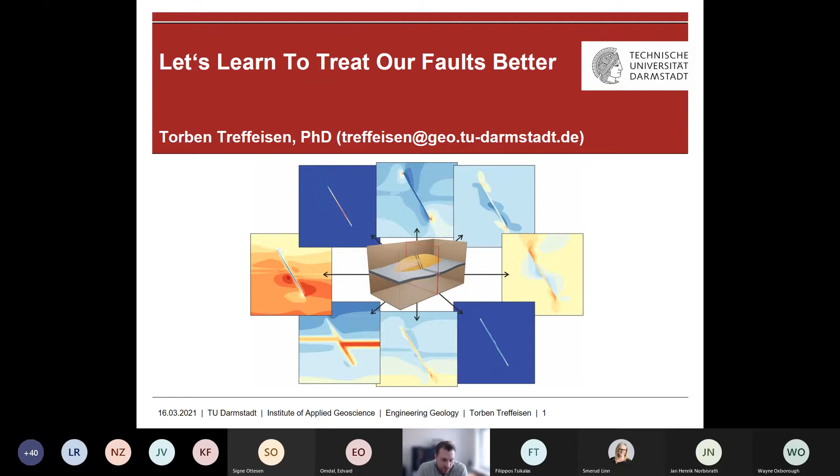Let me start with a short outline of what I will cover in this webinar. Basically, it will be divided into three parts. The first part will start with background information to get us all on the same page. I will talk about why faults are important in reservoir simulations, what challenges we face while incorporating faults, and how faults are treated in finite element models today.

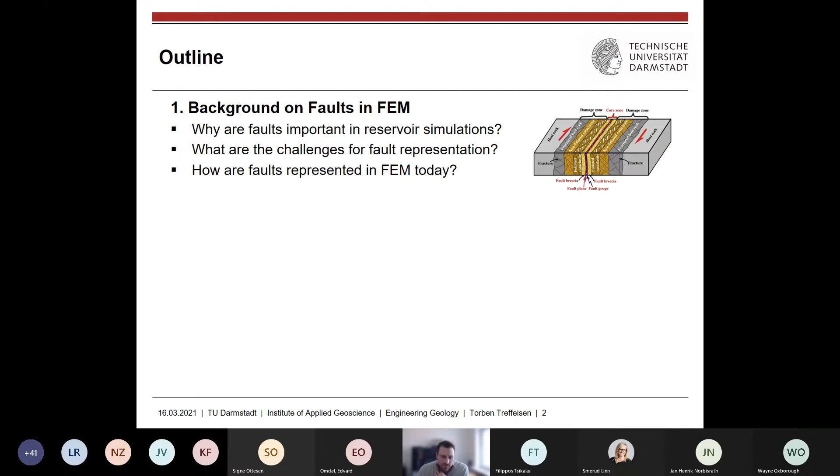The second part, I will present my PhD entitled Fault Representation in Reservoir Scale Hydromechanical Finite Element Models, and talk about whether there are differences in the results derived from different fault modeling approaches. The goal is to give you some hands-on recommendations you can directly use to treat your faults better today.

The third and final part will focus on what I think can be the future of fault representation. I will introduce two possible further developments which I believe could really improve fault representation in reservoir models in the future. I will present two Python prototypes and somewhat outline the path ahead to implement those techniques in the industry workflow.

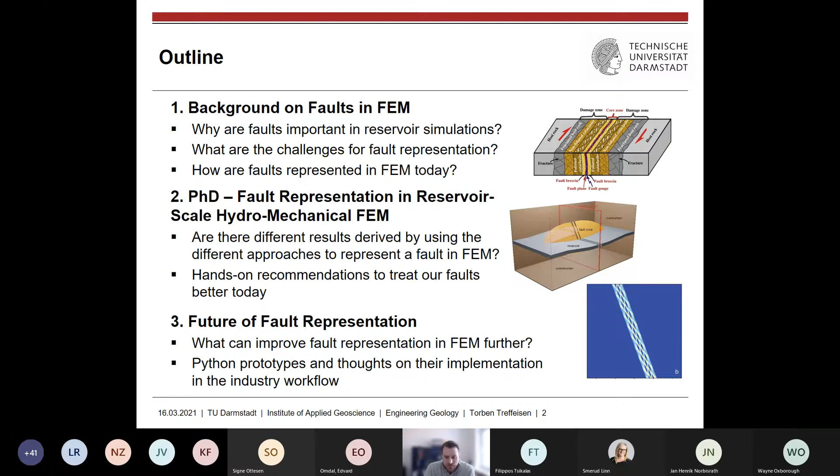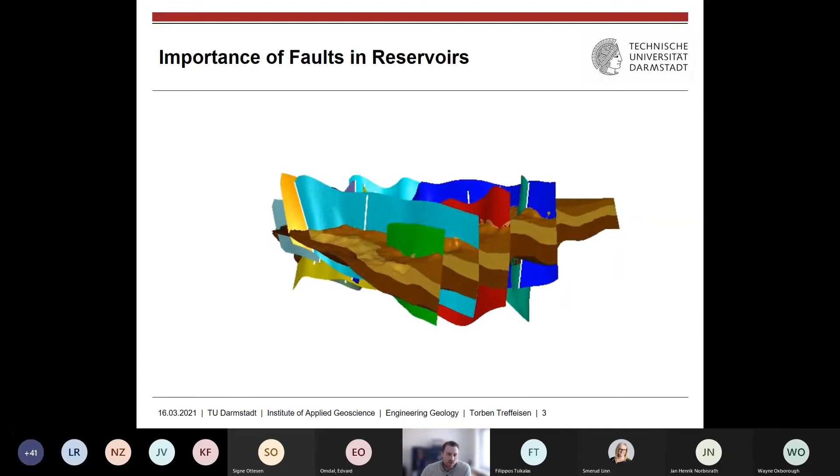Why are faults so important? Well, first of all, they have a profound control on the hydraulic regime, as they can act as conduits or barriers for fluid flow. From the mechanical point of view, faults affect the regional stress field, which results in local changes in stress orientation and magnitude.

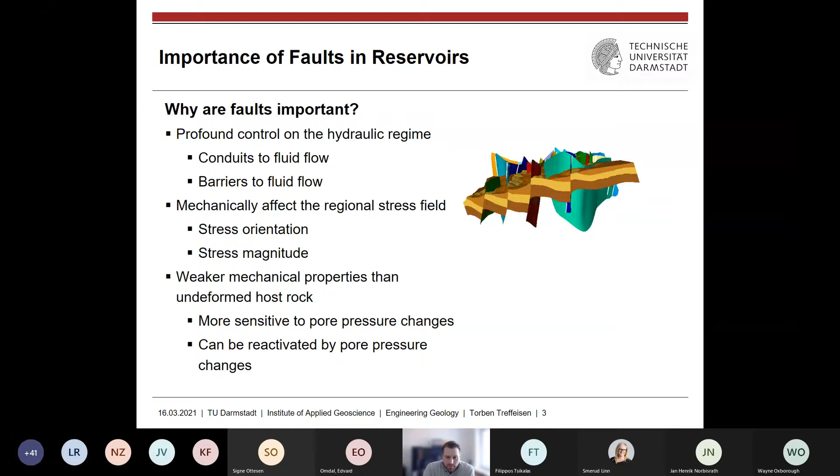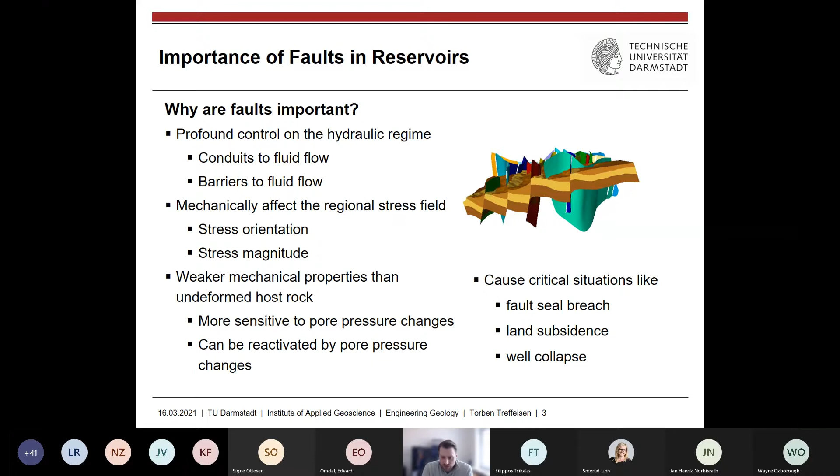Considering the usually weaker mechanical properties of fault zones compared to the undeformed host rock, they are more sensitive to pore pressure changes resulting from fluid injection into or fluid withdrawal from the reservoir. In the worst case scenario, these pore pressure changes can reactivate pre-existing faults, leading to induced seismicity, which in turn potentially causes real critical situations like fault seal breach, land subsidence, and well collapse.

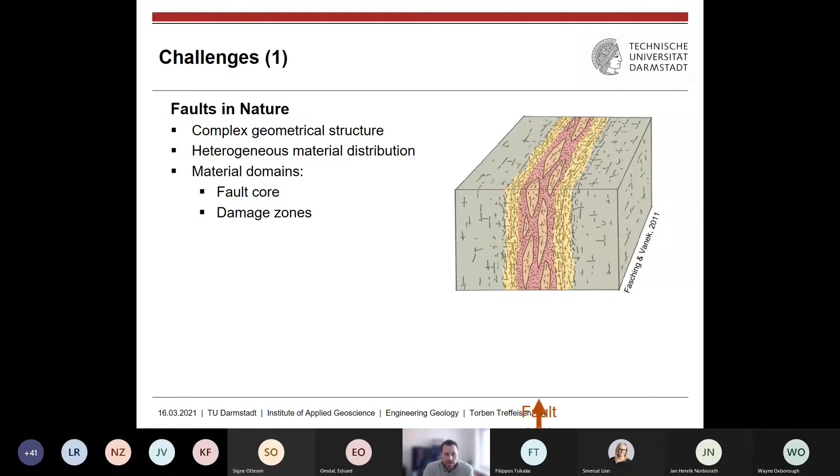Now, before we dive deeper into faults in hydromechanical reservoir models, let's quickly sum up how faults actually look like in nature. Faults are characterized by a complex geometrical structure and a heterogeneous material distribution. A fault zone typically contains at least one fault core accompanied by damage zones on either side. Structurally more complex faults include multiple fault cores as well as damage zones of variable width and fracture intensity. Because of this internal complexity, a fault should be regarded rather as a fault zone and a volumetric feature than as a discrete fault plane.

This structural complexity and heterogeneity of the fault zone varies on a scale of centimeters to meters. So the first challenge for an appropriate representation of faults in numerical reservoir models is the difference between the geometrical complexity as well as internal scale of the fault zone, centimeters to meters, and a typical cell size, meters to tens of meters, of a numerical reservoir model.

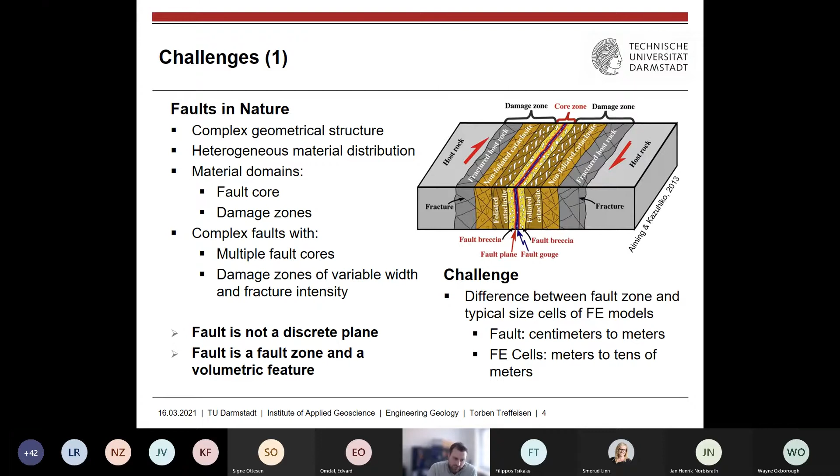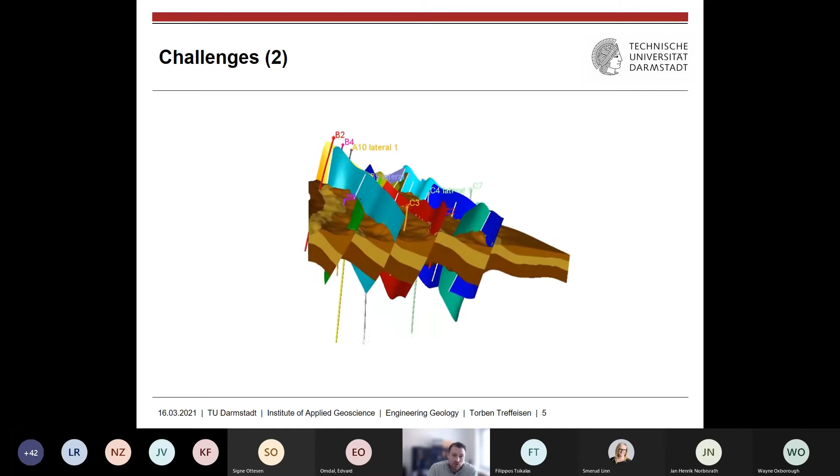All right, now let's go back to the Gullfaks model. I'll show you the well locations drilled during the development of the Gullfaks reservoir. And as you can see, none of them crosses the fault zones, because faults are usually not a target for drilling operations. In fact, we normally try to avoid fault zones during reservoir development to reduce well stability problems.

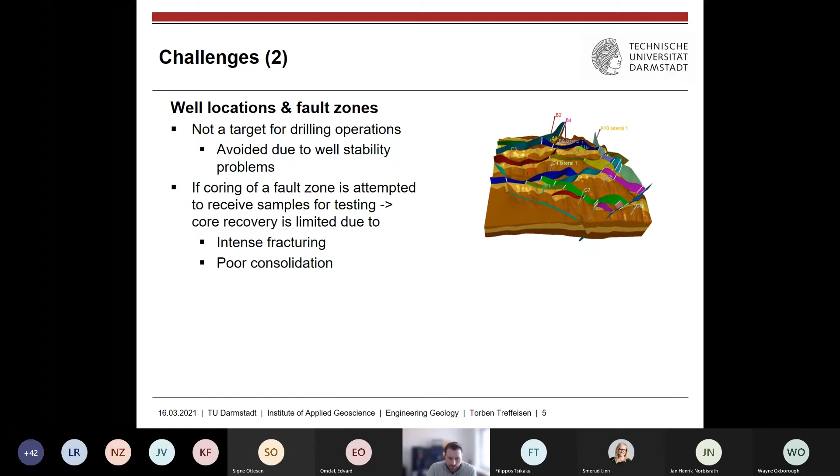And even if coring of the fault zone is attempted in order to receive samples for testing, intense fracturing and poor consolidation of fault zone rocks frequently lead to very limited core recovery. As a consequence, there is usually a lack of fault-specific material parameters to populate a hydromechanical model. Instead, the material parameters often have to be estimated from literature sources. So the second challenge is the lack of fault-specific material parameters regarding fault zone properties.

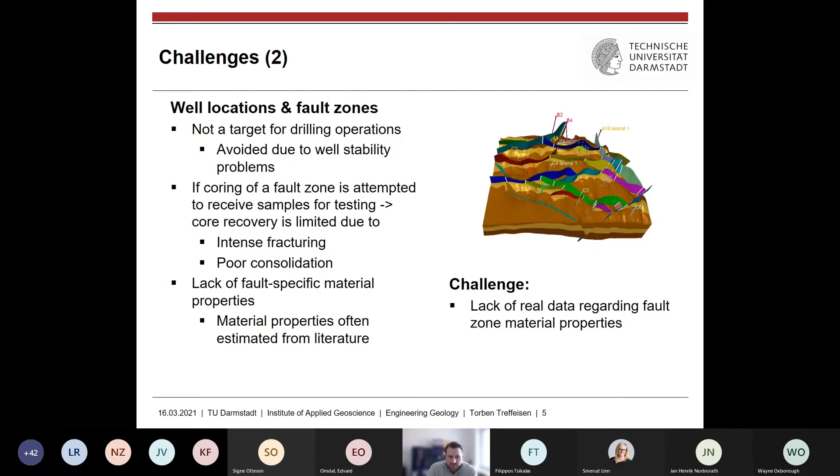Before we go on to my PhD, let me quickly explain the three main approaches used to implement faults in reservoir scale finite element models. Numerically, we can divide them into a discontinuum description, which are contact elements in this case, and a continuum description, which is a volumetric weak zone.

Let's begin with the discontinuum approach. Contact and the corresponding target elements are defined at opposing sides of the pre-assigned faults. So contact elements do allow differential movement between individually meshed parts of the model. A downside of this approach is that the fault is not represented as a volumetric feature, but by a line in 2D and a surface in 3D models, respectively.

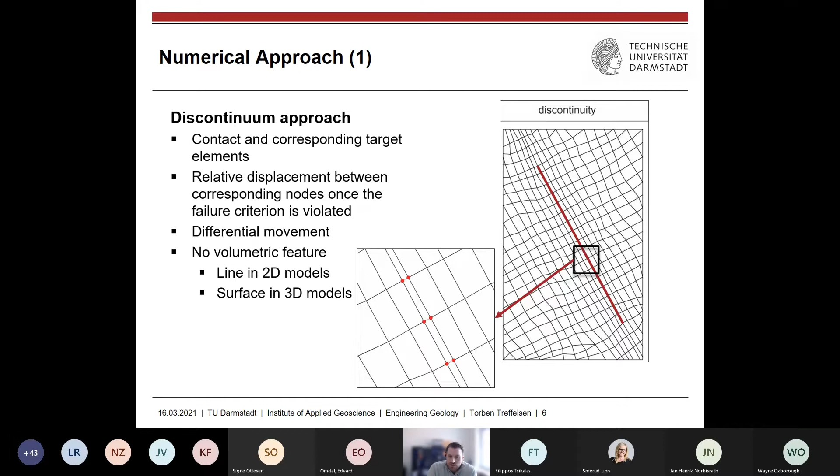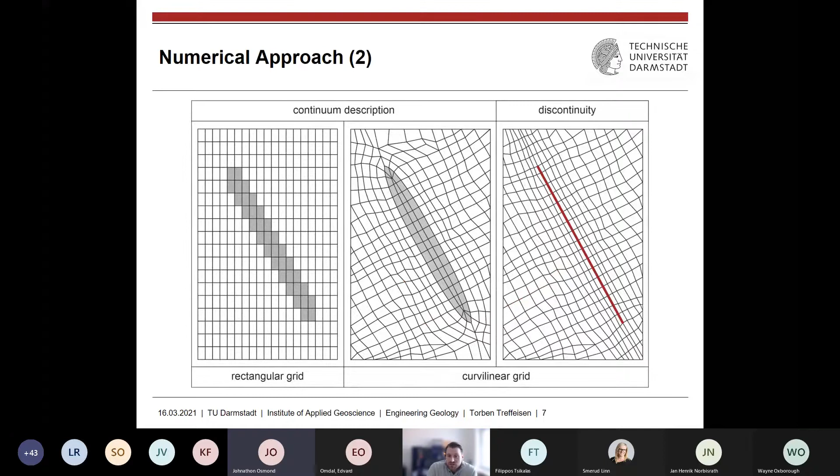All right, now let's see what the continuum approach looks like. The concept of volumetric weak zones describes faults in a finite element model by assigning usually weaker fault rock material properties to the grid cells intersected by faults. To do so, a frequently used approach is to implement a volumetric fault zone into a rectangular grid by intersecting this grid with a structural model and assigning fault rock properties to those cells cut by the fault planes. Such a rectangular grid is fast and easy to generate and therefore saves time in model generation.

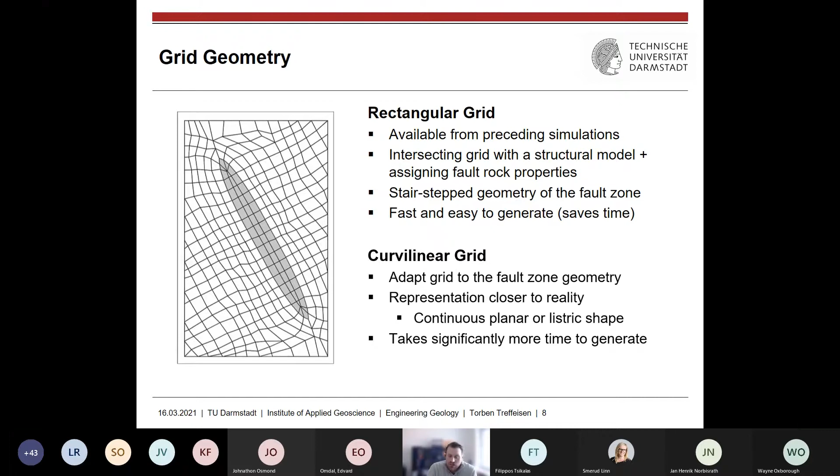Another approach to incorporate faults in reservoir models is to adapt the grid to the fault zone geometry. This allows a representation of the fault which is closer to reality, but adjusting the grid to the fault geometry takes significantly more time to generate, especially for large reservoir models including multiple fault zones.

All right, I will start presenting my PhD by showing you what we imagine to be the possible decisions a modeler faces during fault representation in hydromechanical reservoir simulations. We wanted to investigate the qualitative influence the different approaches as well as numerical assumptions and simplifications by the modeler have on the modeling results.

First, we differentiate between the discontinuum description, which are contact elements in this case, and the continuum description, which is a volumetric weak zone. Second, two different grid geometries for the continuum approach were investigated: a curvilinear grid with the model grid adapting to the fault shape, and a rectangular grid with fault rock properties assigned to the cells cut by fault planes.

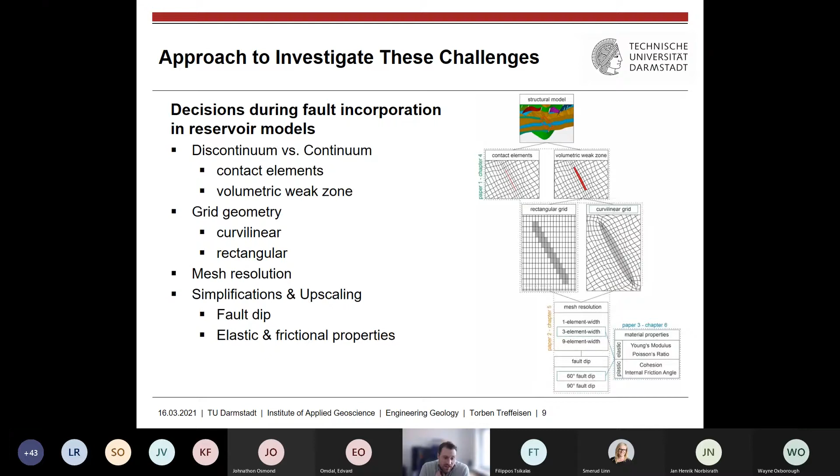Also, the mesh resolution inside the fault zone is investigated further. Lastly, input values like the fault dip and the elastic and frictional properties and their influence on the simulation results are reviewed.

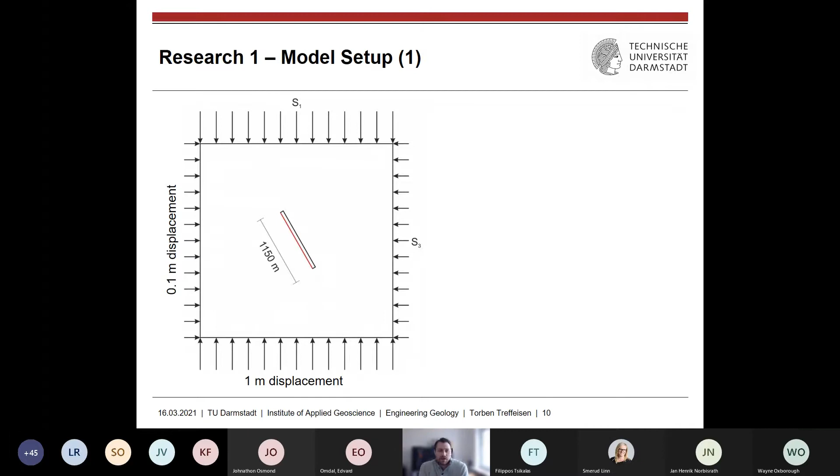We started with a simple mechanical 2D plane stress model. The fault zone is included by using different approaches: the continuum approach with both rectangular and curvilinear grid, and a discontinuum approach with contact elements.

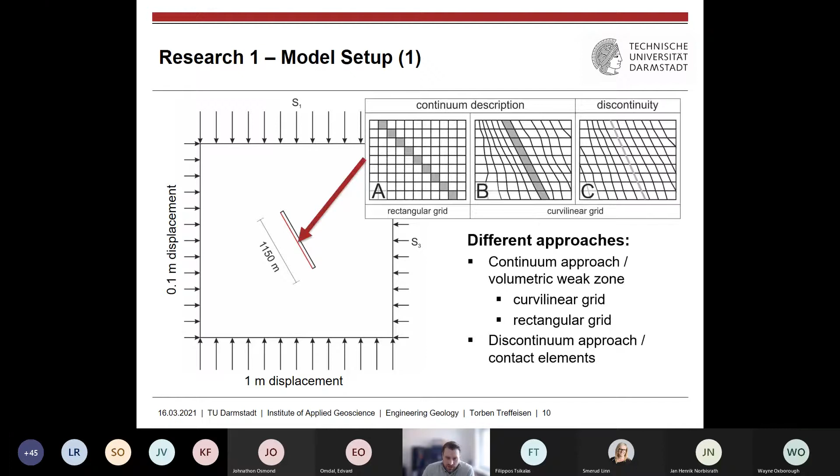The model describes the top view on a vertical strike slip fault. These are the elastic and frictional properties used in the study for the host rock and the fault zone. Please note that the contact algorithm only takes cohesion and friction angle into account.

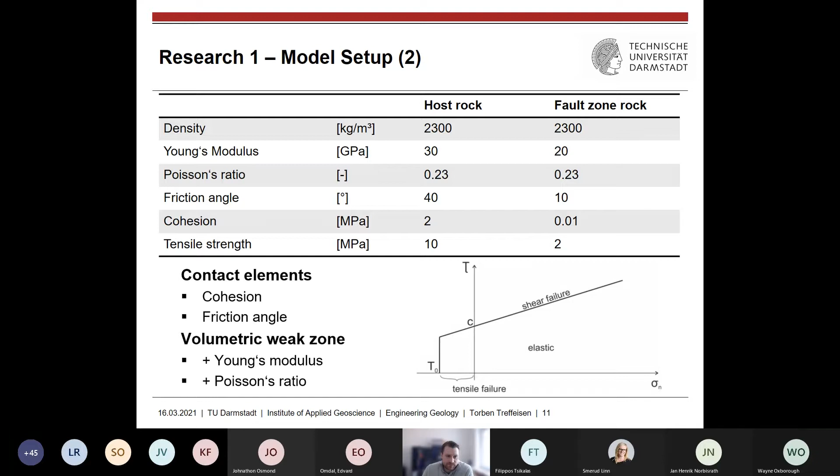The failure criterion used is Mohr-Coulomb with a tensile cutoff. This 2D plane stress model was our first approach to mainly investigate contact elements versus volumetric weak zones. In this presentation, I will limit myself to reviewing the stress magnitude pattern from the maximum principal stress S1 derived from the simulations. From left to right, the results achieved with the rectangular, curvilinear, and contact approach are displayed.

Clearly, the most pronounced effect regarding spatial extent and changes in stress magnitude is observed for fault representation as volumetric weak zone with a continuous curvilinear grid adapted to the fault geometry. A somewhat intermediate effect was found for the fault representation via contact elements. A fault representation as rectangular grid has the least impact.

These observations are the same if stress orientation as well as strain magnitudes are considered.

One last point. I'm sure everyone is asking themselves, why are there differences between the rectangular and the curvilinear approach if both use the same numerical approach, volumetric weak zones? I will tackle this question soon when I present the results for the other research articles, where mesh resolution and grid geometry for the volumetric weak zone approach were of special focus.

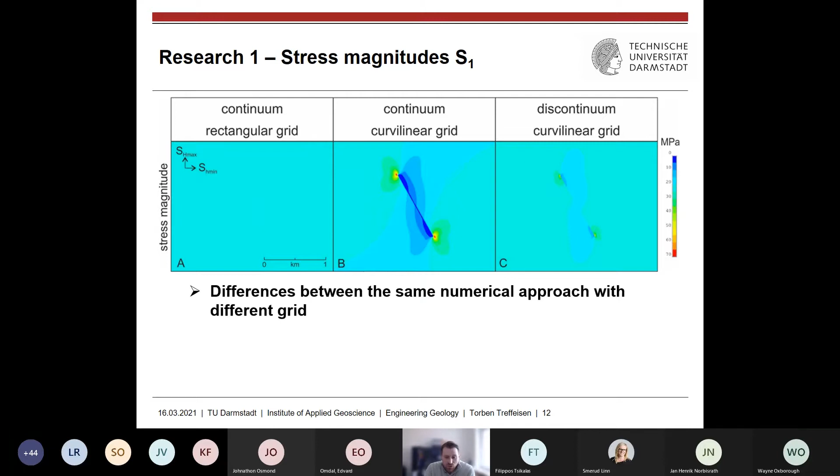We have seen the different fault representations as contact elements or volumetric weak zones produce. Since a volumetric representation enables a 3D representation and thereby incorporation of internal heterogeneity of a fault zone, we focus on this in the following research.

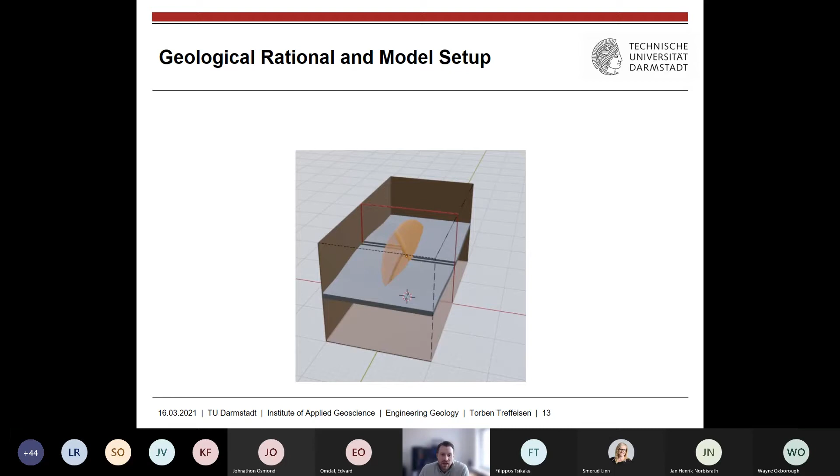To investigate volumetric weak zones and their different simplifications, I imagined an elliptic fault zone displacing a reservoir horizon as geological rationale for this model setup. The actual model represents a one-element wide slice through the central part of this fault.

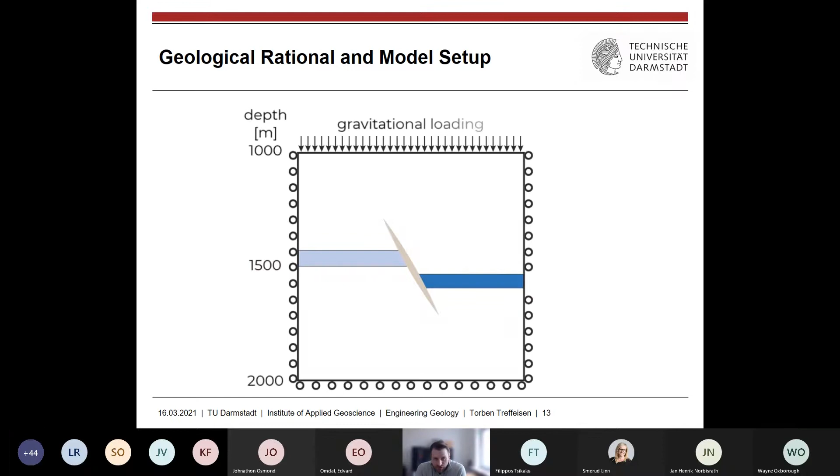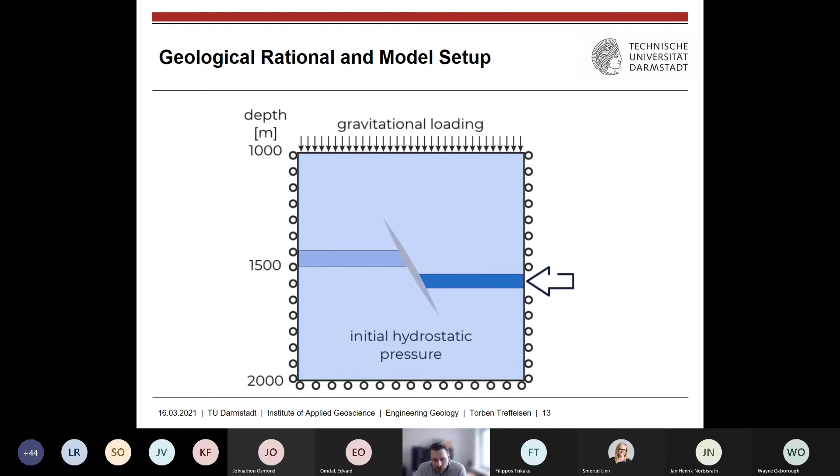This generic finite element model with a volumetric fault zone description has very simple boundary conditions. Gravitational loading, including a lithostatic pressure boundary condition at the top, and a hydrostatic pore pressure field defines the initial state. The fully coupled hydromechanical simulation is run over a period of 5 years, while increasing the injection pressure in the reservoir of the downthrown block by 3 megapascal per year.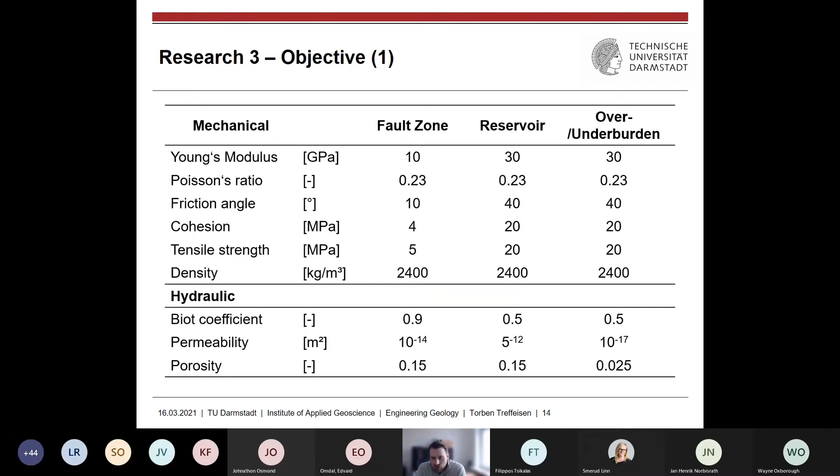Now, let me show you the material properties used in this study. They are the same for all rock units in all scenarios, for comparing the mesh resolution, grid geometry, and fault dip. We also investigated what influence different material properties inside the fault zone have on the simulation results.

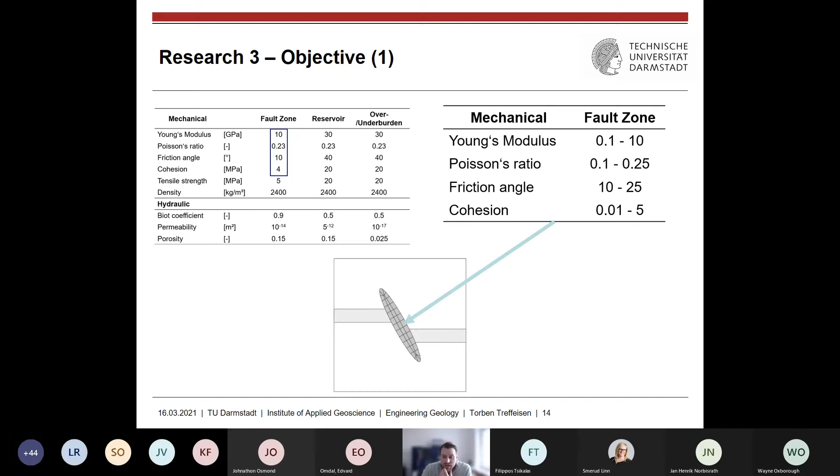In this sensitivity study, 87 finite element models with different mechanical parameter combinations assigned to the curvilinear fault zone have been studied. We varied Young's modulus, Poisson ratio, cohesion, and angle of internal friction within a range typical for fault zone rocks and siliciclastic sequences to examine what effects such upscaled parameters have on the simulations.

All right, since we have discussed the modeling setup, I want to show you a short animation of the simulation results for the curvilinear approach. You can observe how pore pressure, maximum effective stress S1, and plastic strain change over time.

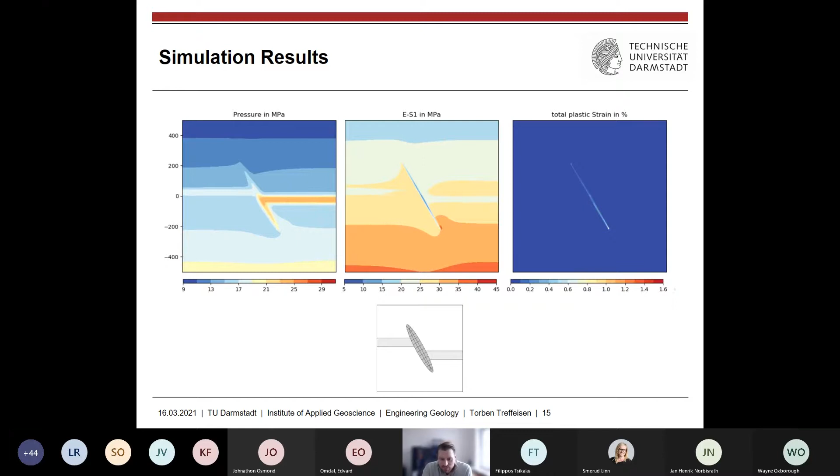Injection leads to an increase in pore pressure, and this increase in turn affects the stress field, not only in the vicinity of the fault. Inside the fault zone, the pore pressure increase reduces the effective stress, and the plastic strain spreads out from the fault tips until the whole fault zone is reactivated and shear deformation occurs along the whole fault zone.

After we have seen how the simulations and results look like in general, let's move on to investigate what influence mesh resolution inside the fault zone has on the simulation results.

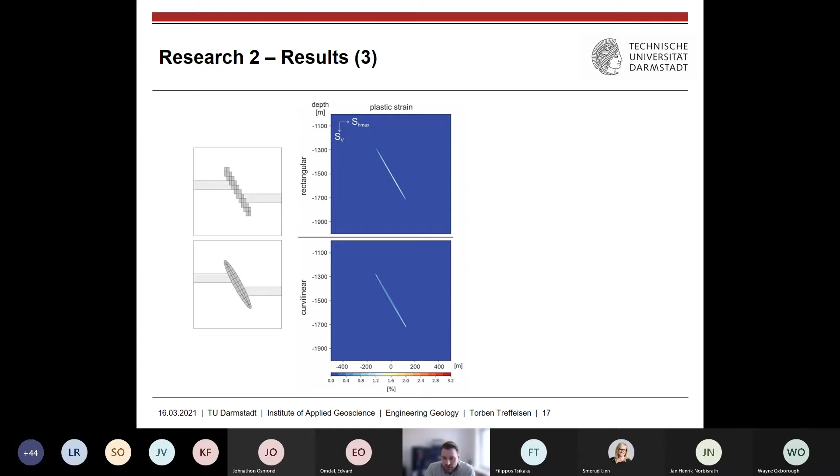Now, let's switch to the results for different grid geometries, the rectangular and curvilinear grid, by looking again at the results for the plastic strain. The rectangular approach is displayed on top, and the curvilinear approach in the bottom row. If we consider the overall strain pattern, both the rectangular and curvilinear approach look quite the same.

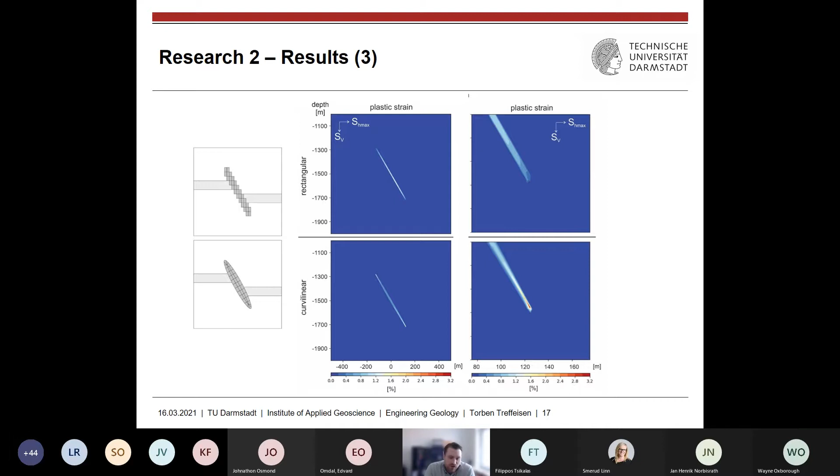But if we take a closer look at the fault tips, we see that the trend is different. While the plastic strain for the curvilinear approach increases towards the fault tips, as we would expect from observation in nature, the rectangular approach reverses this behavior and decreases towards the fault tips.

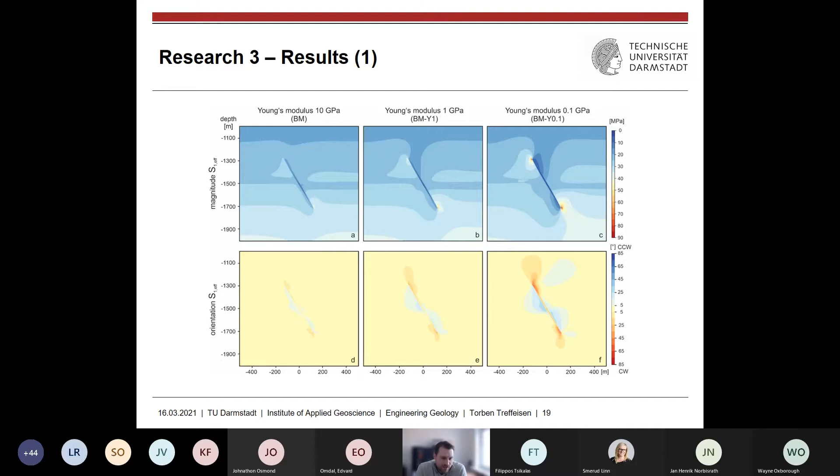Now, what is the influence of varying elastic material properties inside the fault zone on the simulation results? Here, the Young's modulus of the fault zone decreases in the models from left to right from 10 gigapascal to 0.1 gigapascal. We can see the results for the magnitude as well as the orientation, or more precisely, the rotation away from the original vertical direction of S1 effective. It's clear that both parameters increase in both actual value and extent around the fault zone with decreasing Young's modulus, and hence increasing stiffness contrast between fault zone and surrounding rock.

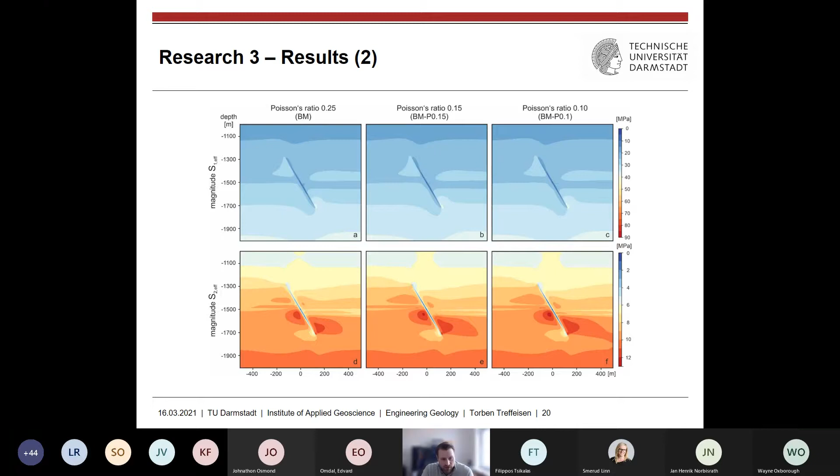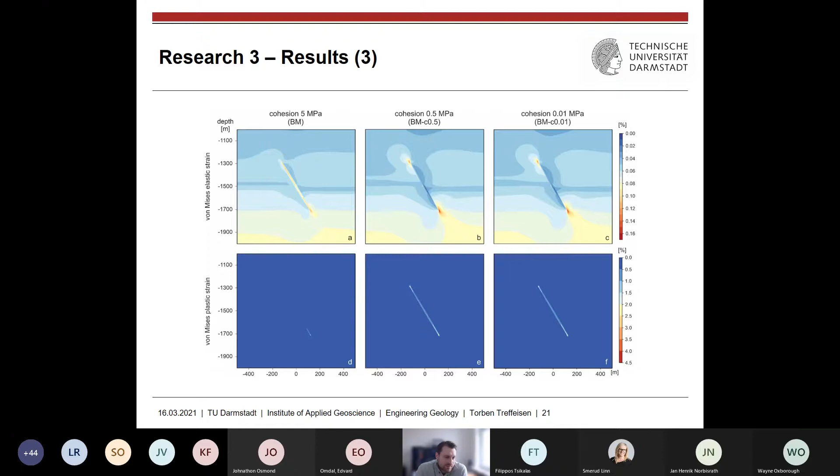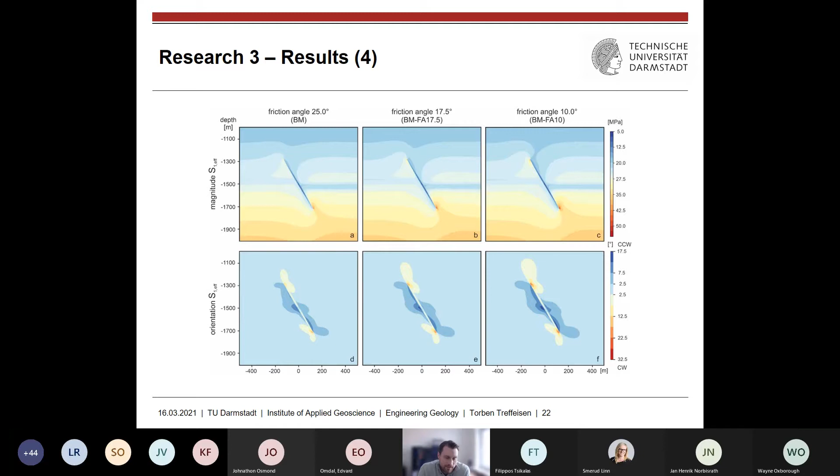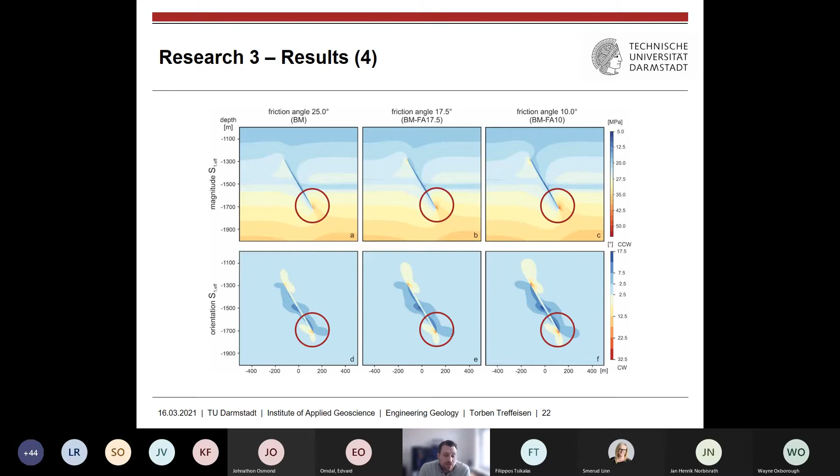We finish presentation of the modeling work by comparing the results achieved with different friction angles. The internal friction angle of the fault zone is 25 degrees, 17.5, and 10 degrees. The results displayed here are again the magnitude and the orientation of S1 effective. At first, the results appear to be quite similar, but if you take a closer look, especially at the fault tips, we see both parameters increase with decreasing friction angles in a more or less linear way.

Now, let's sum it all up and integrate the results of my PhD into the decision tree a modeler may face during fault incorporation in reservoir scale hydromechanical models. Regarding the numerical approach, contact elements or volumetric weak zones, results of this thesis indicate that the smaller the scale difference between the general element size of the model and fault zone, the more worthwhile is the representation as a volumetric weak zone. On a reservoir scale, such a volumetric representation as a weak zone enables incorporation of more details.

Starting with simply subdividing the fault zone into fault core and damage zone. In contrast, in models tending towards the regional scale, contact elements may be the better choice due to the huge scale difference between the fault zone and the elements of the finite element model.

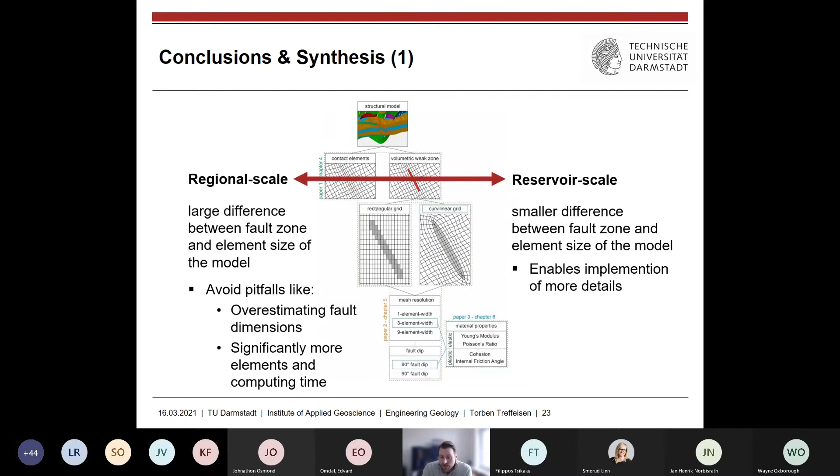Looking at both grid geometries, for a volumetric weak zone, similar stress and strain patterns are obtained at a distance of more than 10 meters away from the fault zone, and hence both are interchangeable here. Based on this consideration, the modeler may choose a rectangular fault representation when modeling a full-scale reservoir, and only use the curvilinear representation where a fault zone is of special interest.

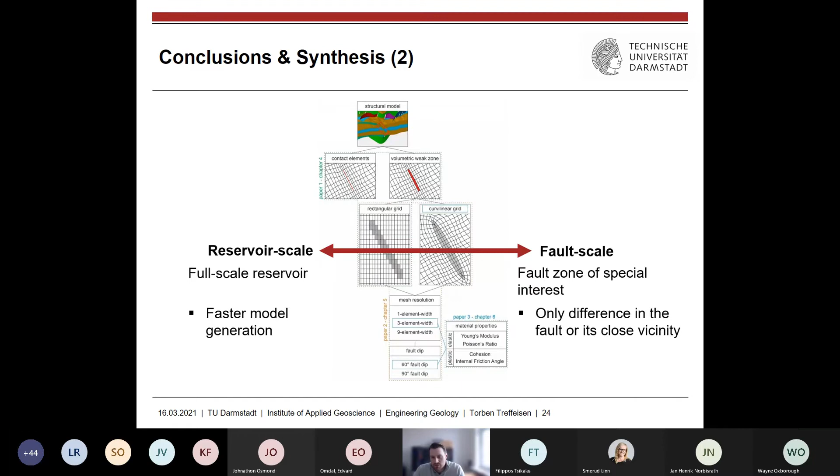Adapting the grid to the fault zone and using a curvilinear fault zone representation requires much more time in model generation, and therefore may only be reasonable if the aim of the study is inside or in the vicinity of the fault zone.

The mesh resolution has to be considered very carefully, since it can, combined with a rectangular grid, lead to serious errors. It needs to be ensured that the fault cells do not interlock with the surrounding, stronger and less permeable host rock, as this affects both fluid flow through and straining of the fault zone.

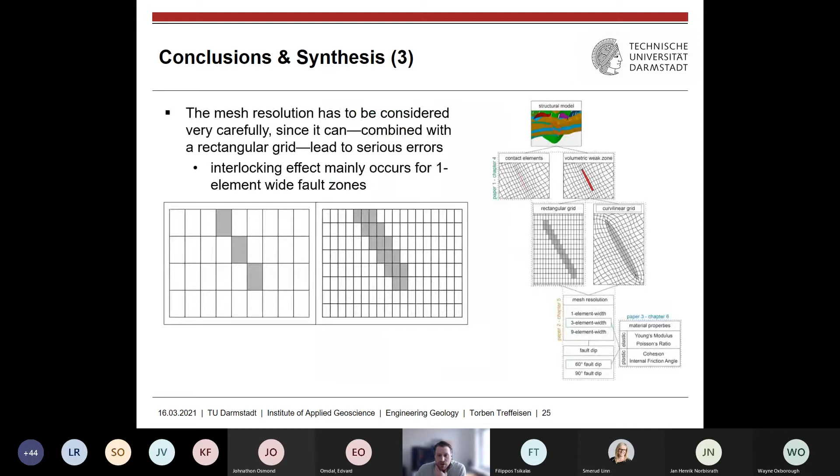This interlocking effect mainly occurs for one element-wide fault zones. For grids with multiple element-wide fault zones, the only differences are observed in the vicinity of the fault tips. 3 element-wide fault zones appear to be appropriate for most reservoir scale models. Only if the aim of the study is within a few tens of meters of the fault zone should a finer grid resolution be considered.

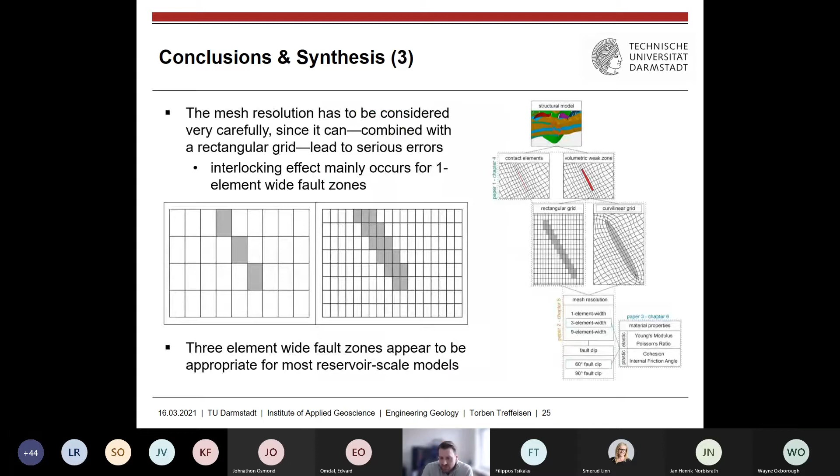Different fault dips produce results in different stress and strain patterns. Therefore, care should be taken to consider a realistic fault dip, rather than using a vertical fault dip for simplification. But different fault dips produce similar hydraulic results. So if the aim of the study is primarily on hydraulic issues, vertical faults can be an acceptable simplification.

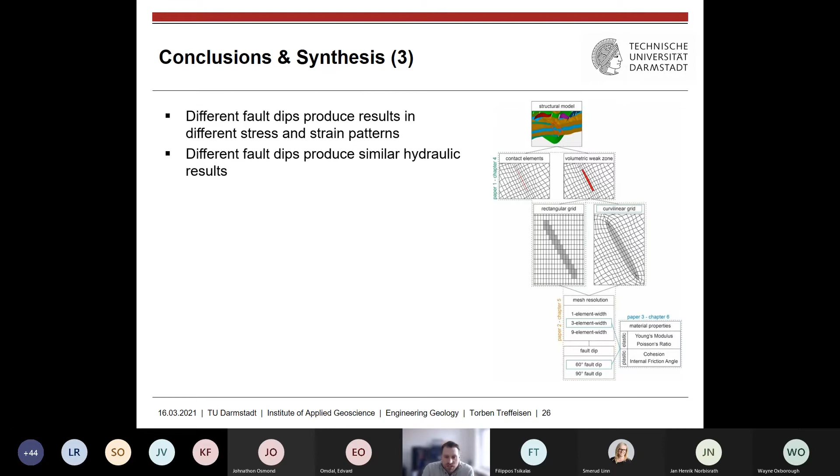Speaking about the material properties assigned to a volumetric weak zone, no significant impact on the stress and strain pattern in the far field of the fault is observed. Far field in this respect means at distances of more than a few hundred meters to the fault.

So if your modeling project doesn't focus on the vicinity of a fault, the fault zone properties can be determined based on literature data and a rule of thumb. In contrast, if the near field zone is of interest for the particular modeling project, care should be taken to find

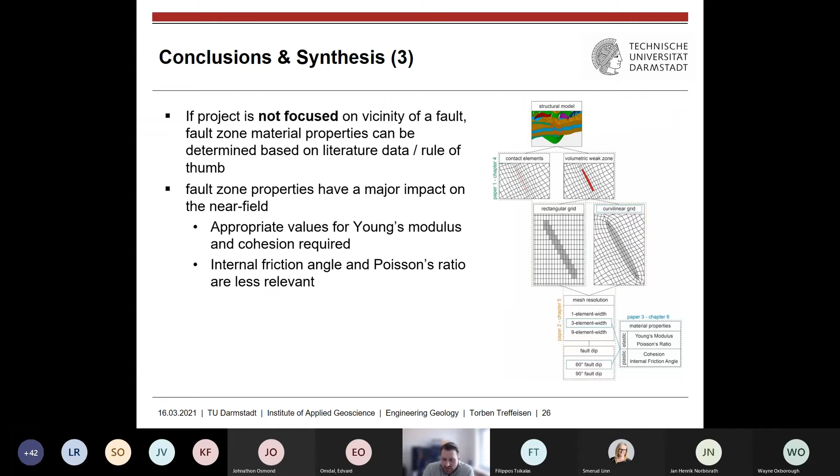appropriate values for Young's modulus and cohesion. The angle of internal friction is of less relevance, and for the Poisson ratio, the standard value of 0.25 can be adopted without concern. I hope these recommendations, following the results of my PhD, will help you to treat your faults better today. However, there are still open questions and research areas for fault representation in finite element models.

So, what's the future of fault representation? Well, basically I would divide future developments into more detailed fault zone models and new upscaling techniques, especially for hydromechanical or even hydrothermomechanical fault zone material properties.

Don't get me wrong, this is not fully scientifically verified. These are some ideas which came up in my mind, thinking about what I've learned about fault representation in the past 3 years, and what needs to be done to improve it further.

I already developed Python prototypes to tackle these issues. Of course, these prototypes need further development, testing, and verification before they can be implemented into the industry workflow. However, I truly believe this can be the future of fault representation.

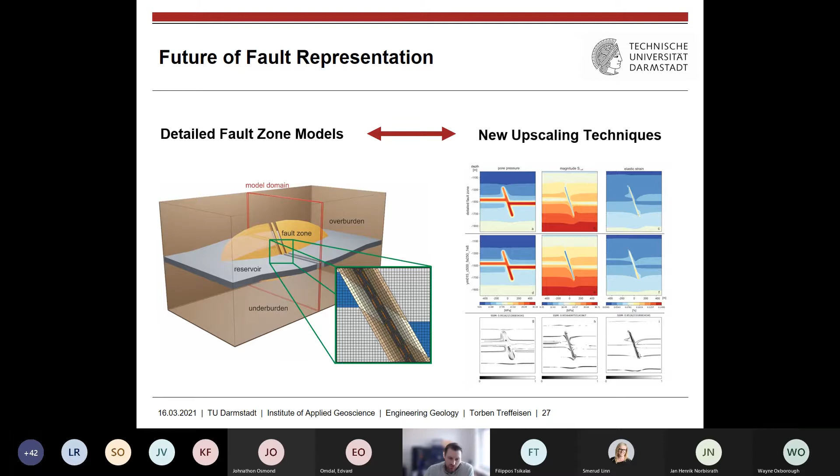Let's start by talking about a detailed fault zone model. As we know, fault zones in reality are more complex than how we represent them in reservoir scale models. So we should investigate what the results for a more detailed fault zone model would look like, especially what differences can be observed on the different scales.

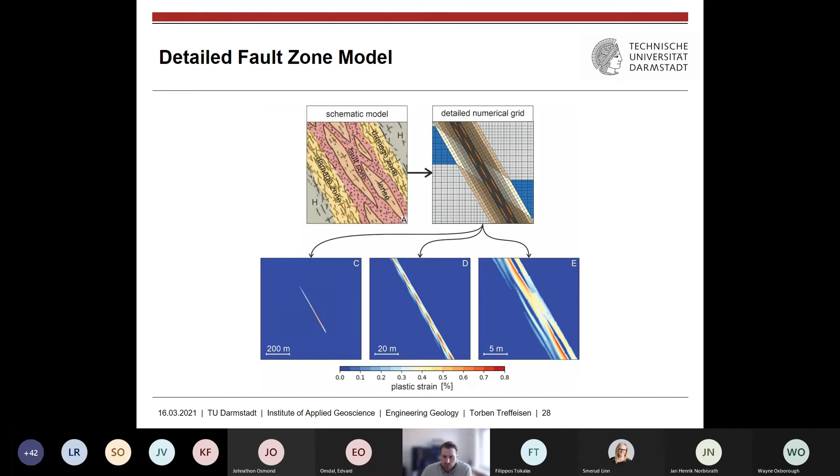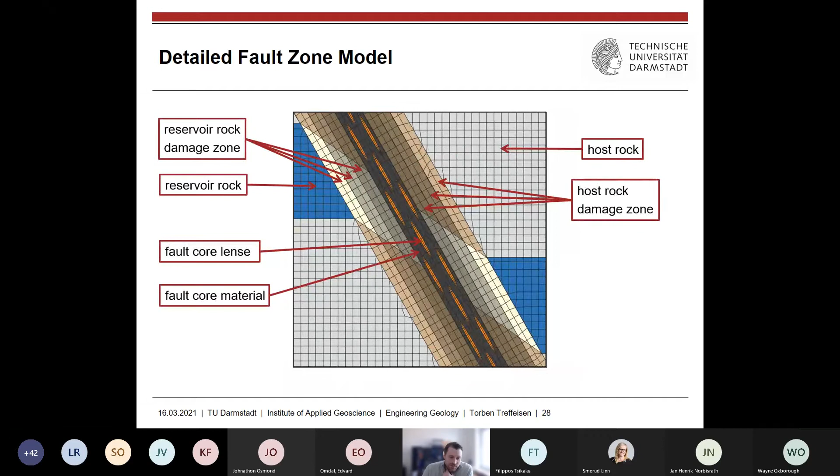Now, how could such a more detailed fault zone model look like? Well, the fault core could include fault core lenses embedded into a highly deformed fault core material. The damage zone could be divided by the origin of its material, but also into zones to honor the decreasing fracture density with increasing distance to the fault core.

Another case we investigate right now is a detailed impermeable fault zone. Again, the overview of the model domain is displayed in the top, and the bottom row shows a model section 50 meters around the midpoint of the fault.

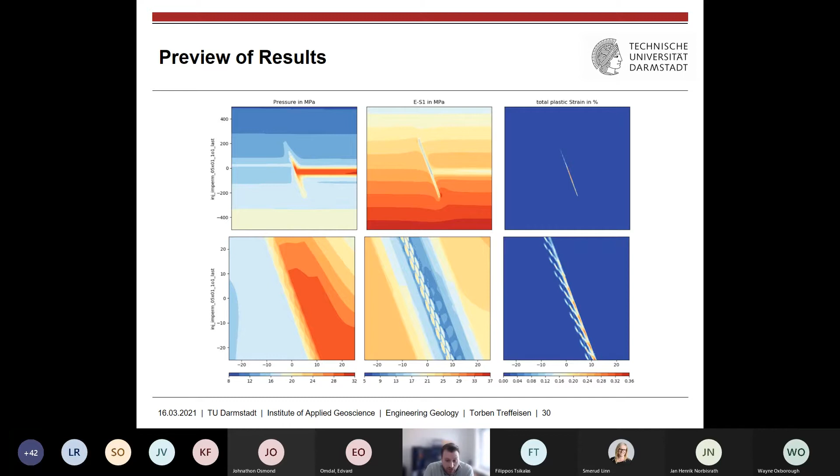Interesting results, aren't they? Now, you may say implementation of detailed fault zones in reservoir scale models would take too much time to generate. But what if we can automate detailed fault generation? And yes, we can do that.

I've already written a Python application called FaultGeometry with a graphical user interface where you can define various input values for the fault geometry. FaultGeometry can then create an input file including all commands needed to generate the model geometry.

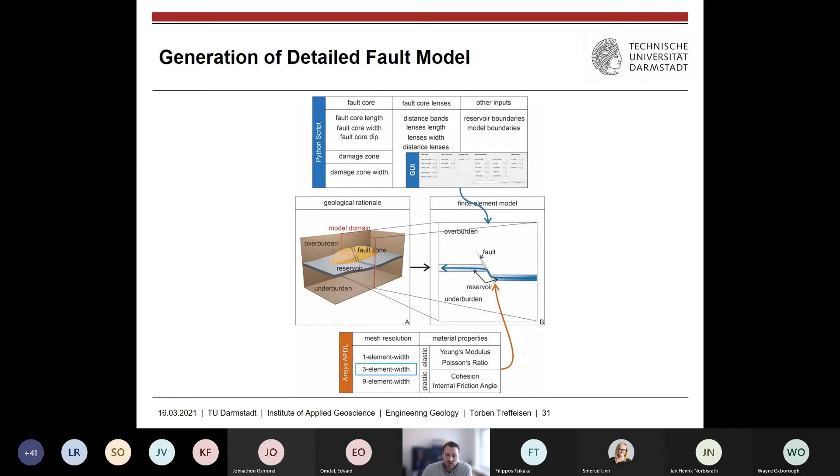All that needs to be done in ANSYS is meshing of the predefined volumes and assigning reasonable material properties. This script reduces the time needed to create such a complex fault geometry from days to seconds. The whole model setup, including material properties and boundary conditions, can be done in less than 30 minutes. Now, why do I believe that FaultGeometry can be a prototype for future fault representation?

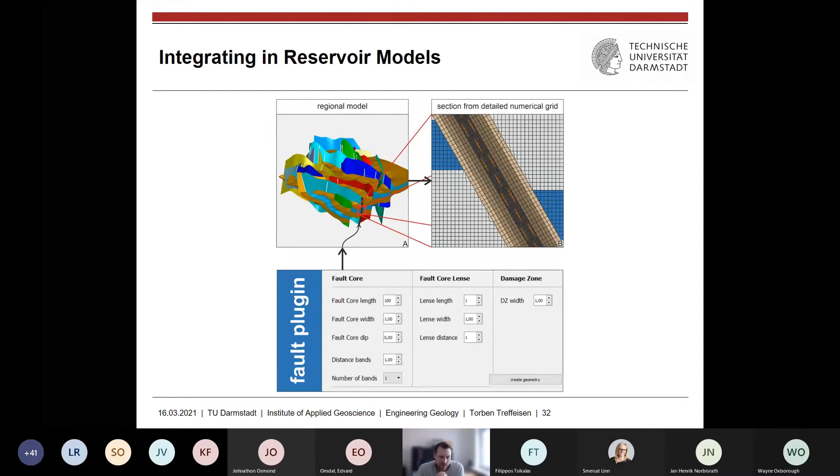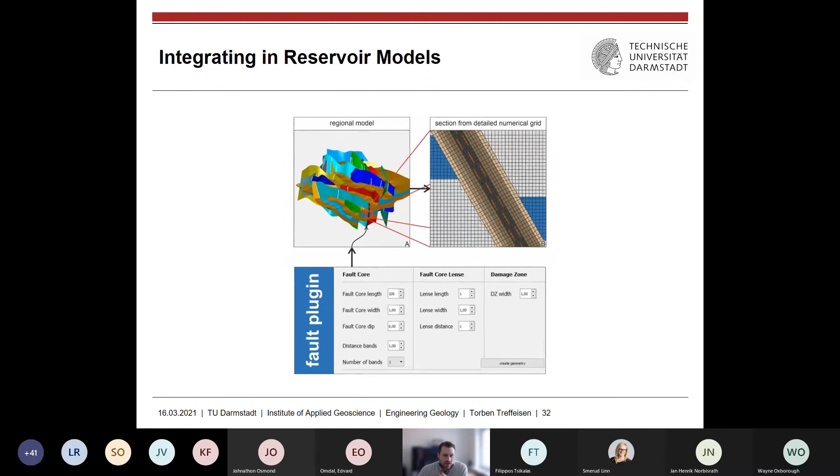Imagine this: instead of returning ANSYS commands to generate a detailed fault zone model, a plugin is fully integrated in the software you use. While you build a model geometry, you define the fault zone by simply specifying the inputs FaultGeomPy uses. Afterwards, the fault zone geometry is automatically implemented into the reservoir model, taking intersections with different layers into account. In a second step, the material properties of the fault zone rock units are defined, completing the integration process. Now, what needs to be done to integrate FaultGeomPy in a reservoir simulator?

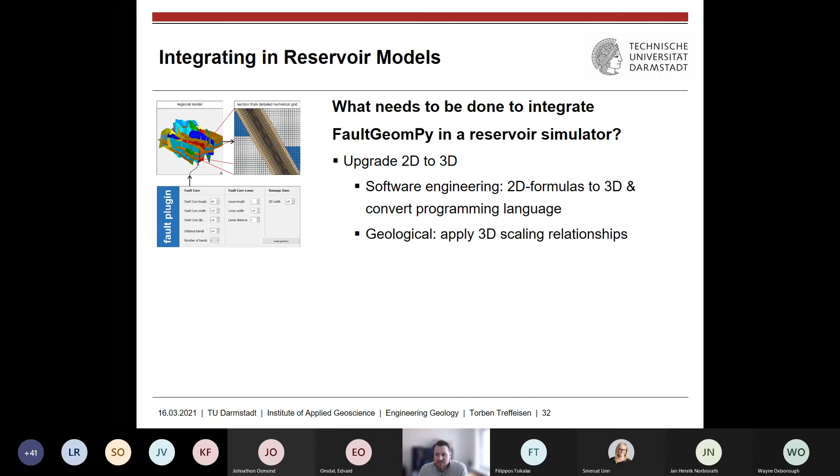First, it has to be upgraded because right now FaultGeomPy more or less creates a 2D fault zone model. However, I don't think this would be a big issue. From a software engineering point of view, enhancing the used 2D formulas to 3D shouldn't be that much of a challenge. And from the geological point of view, all the scaling laws I used, for example for the lens dimensions, exist in 3D too. So upgrading this tool from 2D to 3D is a delicate but routine piece of work.

Second, the code has to be converted into the programming language the desired reservoir simulator uses.

There's one challenge left for integrating more detailed fault zones into reservoir scale models: the model size, or more precisely, the number of elements needed. Won't they increase significantly for such a detailed fault representation? Well, of course they do, but our industry is improving computation capabilities rapidly. I know that two big companies are working on pushing the boundary for reservoir simulations beyond one billion elements right now, and that will enable us to include such small-scale variations into reservoir scale models.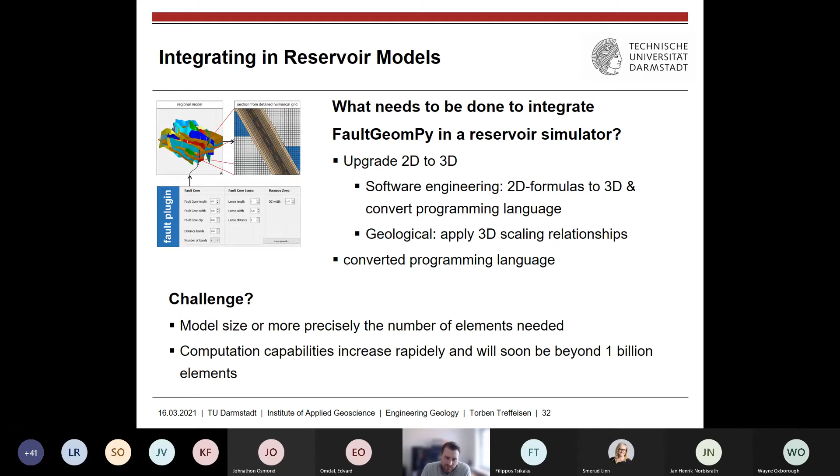The basic idea behind this new workflow is to enable a concurrent upscaling of hydraulic and mechanical material behavior by focusing on the desired results and not on the actual material properties. Let's jump right into it to give you a better idea of what I mean by that.

The workflow starts with a regional reservoir model, such as the Gullfaks reservoir model here. First, one fault zone is extracted, and a detailed model of the fault zone is generated in a relatively generic model setup, similar to the model setup, for example, with FaultGeomPy. Using the same generic geology, we set up a database including a fault zone defined by only one set of material properties. This database is created by varying this one set of fault zone material properties through a range possible in the regional setting. Having both the detailed fault zone model and the database allows us to use the Python prototype FaultUpscalePy. Now, what does FaultUpscalePy do?

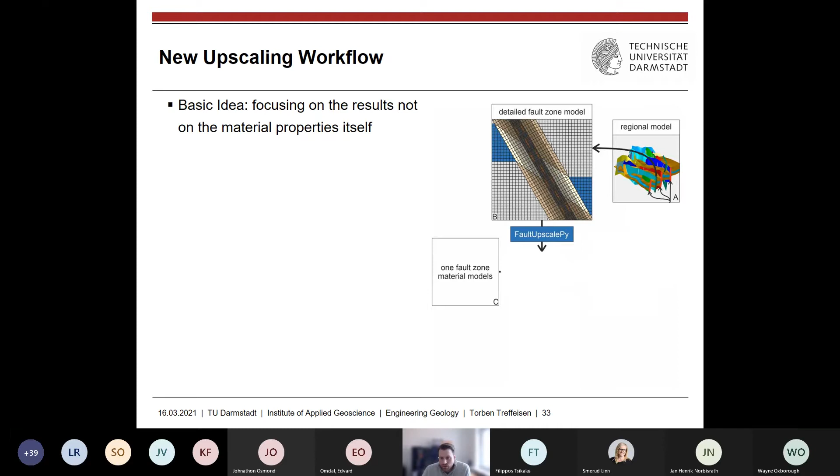Well, first of all, FaultUpscalePy simply plots out the simulation results for the models in the database and the detailed fault zone model using the exact same color scale and saves them as images. Once this image database is generated, the results of the detailed fault zone model are compared with every model using one fault zone element material. This is done by utilizing the structural similarity index for each image pair, which I'll explain later. Lastly, FaultUpscalePy gives back the one upscaled fault zone material which matches the results of the detailed fault zone model best.

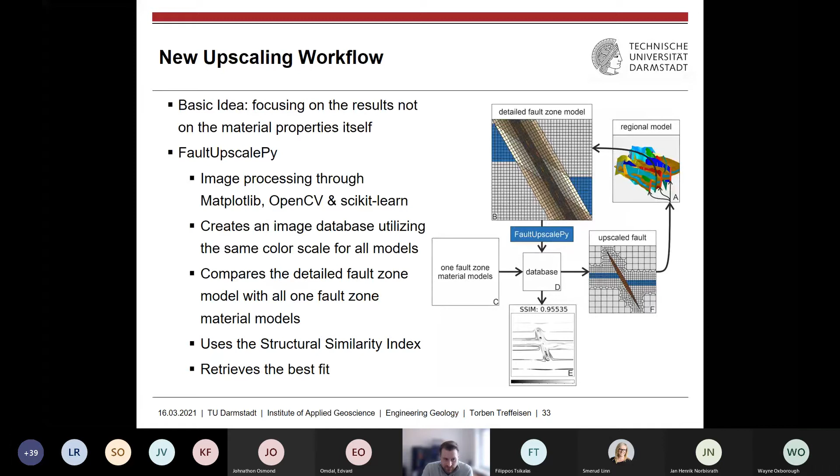All right, let me show you what the output of FaultUpscalePy looks like. In the upper row, we see the results for the detailed fault zone model, and in the second row, the results for the one fault zone material model which matches the results best. In the last row, the structural similarity index of both images is displayed.

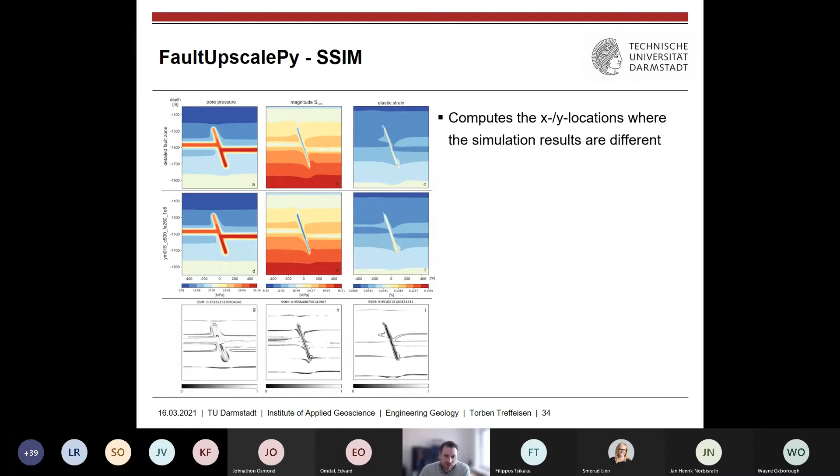Now, what is the structural similarity index? This image processing method computes the exact X and Y coordinate locations where the simulation results are different. FaultUpscalePy calculates a value for the structural similarity index for each pair of results. The value ranges between 0 and 1, with 1 representing perfect similarity of both simulation results.

In a last step, FaultUpscalePy creates a difference image for the result pair with the highest structural similarity score, which visually shows the X and Y coordinates where the differences are. This could help the modeler decide whether there is a satisfactory fit regarding the aim of the reservoir simulation.

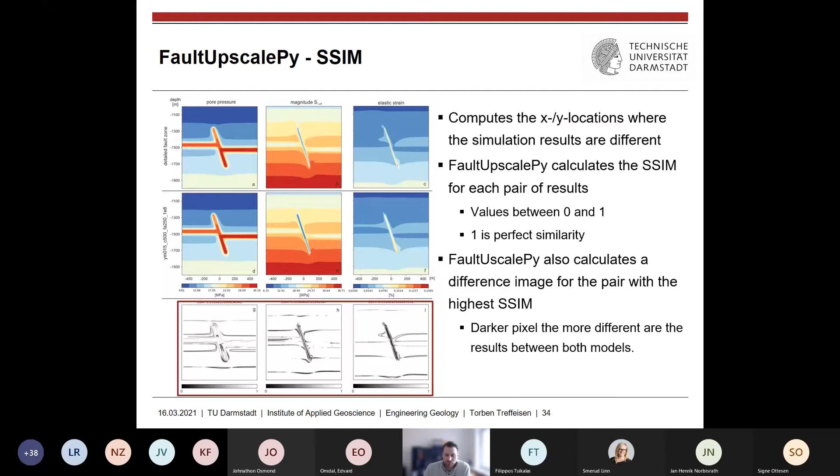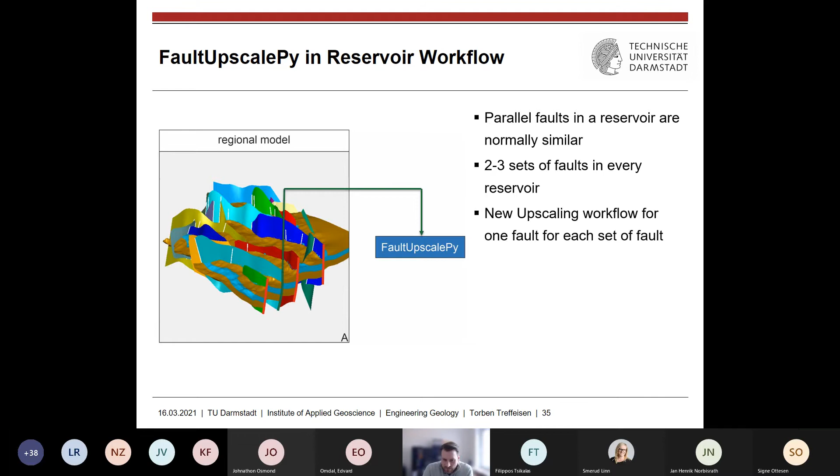You may say upscaling every fault in a reservoir model with the workflow I suggested would take too much time. But what if we don't need to follow this workflow for every fault? For a sedimentary basin, which we normally have for oil and gas reservoirs, parallel fault zones normally exhibit similar fault behavior. So I would suggest upscaling one fault zone for every set of parallel faults, which limits the upscaling process significantly. The upscaled fault zone material can then be assigned to all parallel faults in the reservoir. And now I know this workflow needs plenty more testing, but I really believe this somewhat out-of-the-box approach is worthwhile further research.

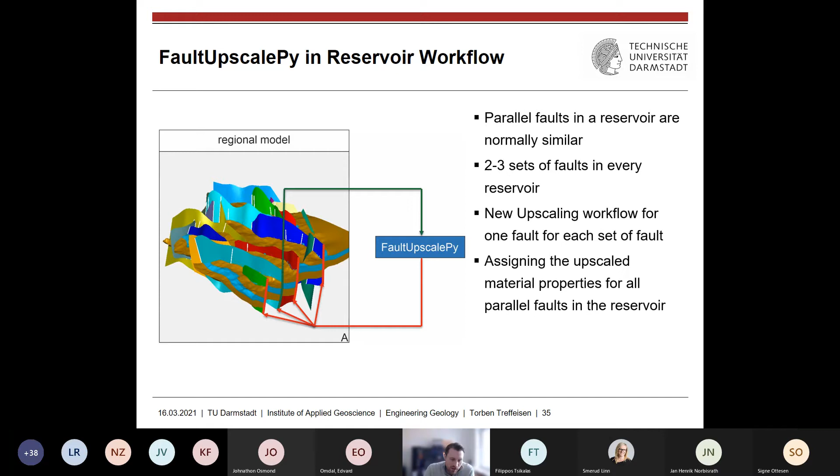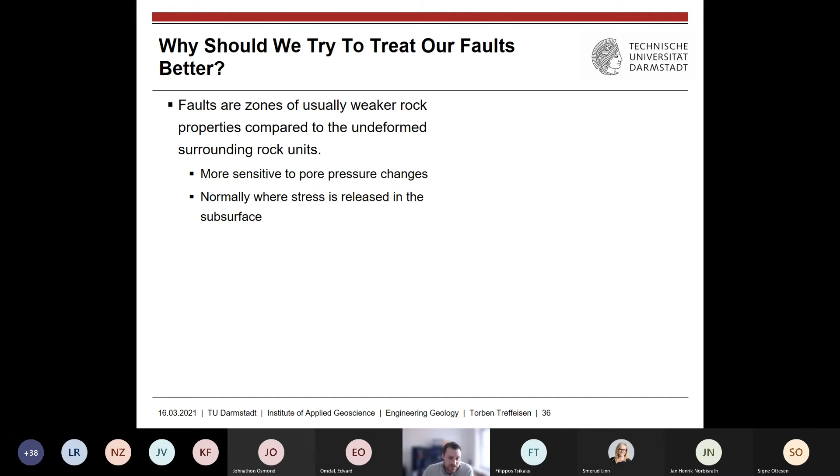One last thing. You may think the two future developments I suggest are more trouble than they're worth. Why should we try to treat our faults better? First, let's remember faults are zones of usually weaker rock properties compared to the undeformed surrounding rock units. This in turn means they are more sensitive to pore pressure changes due to production and even more to injection. Faults are normally where stress is released, deformation and induced seismicity occurs in the subsurface. And induced seismicity is a big issue for our industry. Could we prevent something like this if we had a better fault zone representation in the models? And what about CCUS? Injection and increasing pore pressure is more likely to reactivate pre-existing faults. So I think faults will be even more important in the future of our industry.

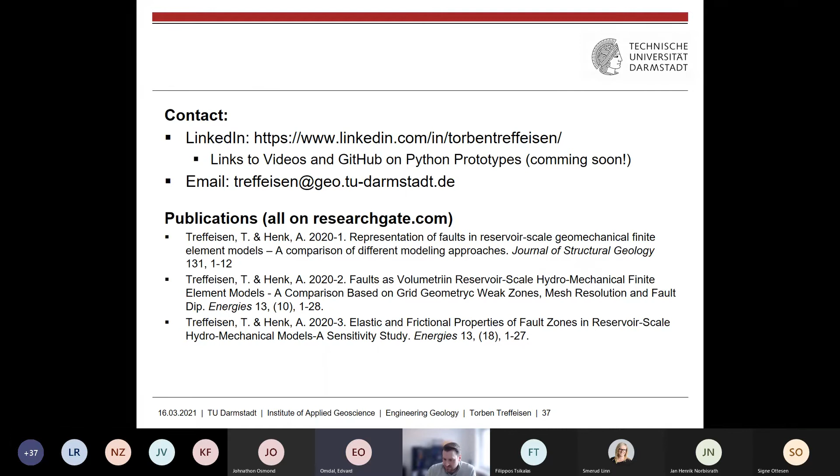So I guess we'll open up for questions, and for those of you who want to voice your questions yourself, you can do that, or you can put them in the chat and I'll voice them for you. I'll start with just a recognition that we as a team of geologists in ConocoPhillips went on a field trip to one of the big tunnel projects in the region, in the Stavanger region, just a couple of years ago, and the entrepreneur had a classification of faults or rocks in general as good rock and bad rock being faults. So I think you've taken this to a completely different level. That was good to see. Any questions?

So I'll start with the question then. You've now really shown in detail what the different parameters and gridding are, and how this works, what's sensitive to movement and behavior. But, I guess this is not your side of the work now, but how do we know what is correct?

Yeah, this is a very good question. Basically, we cannot know what is really correct, because to evaluate this question, we should have a fault zone which is completely known, where we have all the material properties for all the different fault core units and all the damage zone units. And this doesn't exist in the world. But from a reservoir engineering point of view, we can check our fault by a calibration process, and therefore see if the results of our faults are fitting the model we want to see.